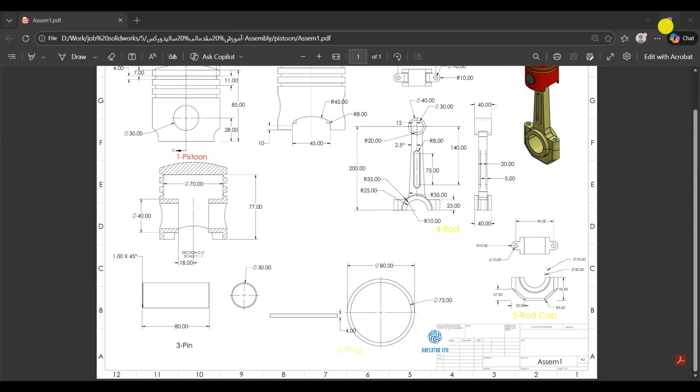Now let's design this ring together. Open SolidWorks and start a new part. On the top plane, start a new sketch. Create 2 circles in the sketch. Set the diameters to 80 and 72 millimeters.

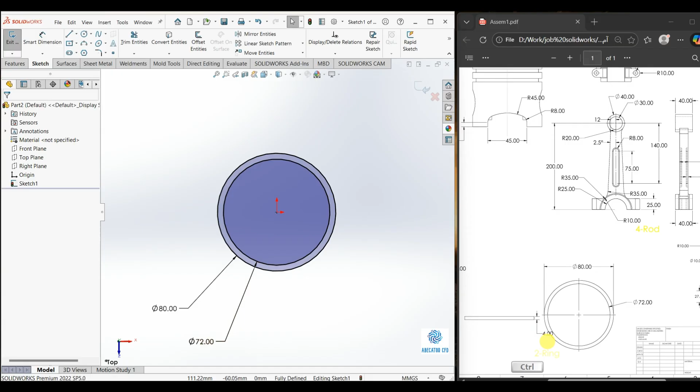The ring thickness here will be 4 millimeters. Now open Extruded boss/base and set the thickness to 4 millimeters. Then assign a color to the part and click OK. Save this part as ring.

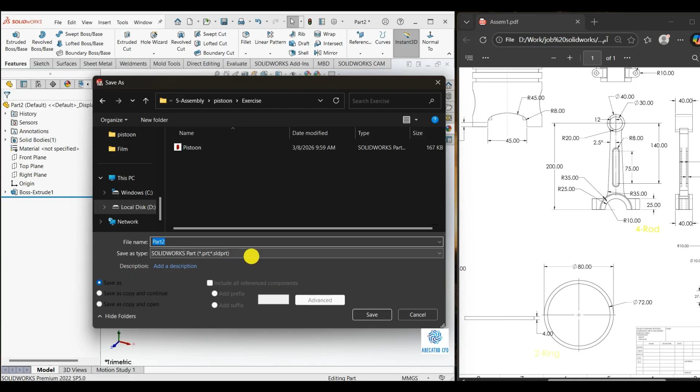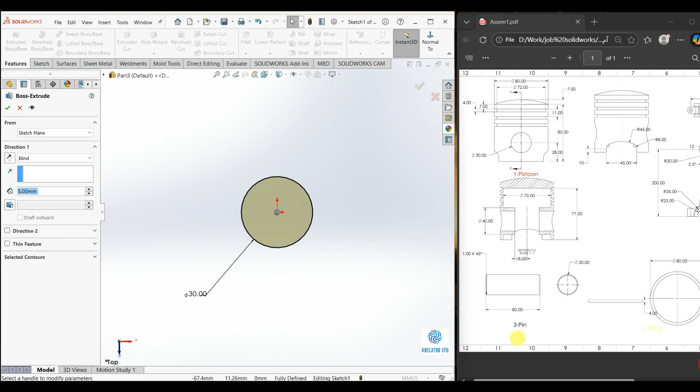Now let's design this pin. Start another new part. On the top plane, start a new sketch. Create 1 circle with a 30 millimeters diameter. Then open Extruded boss/base and set the length to 80 millimeters. Create the thickness here as well. You can also do this with mid-plane.

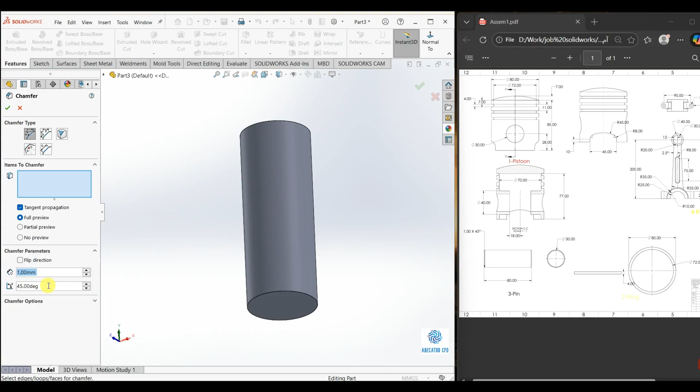Now add 2 chamfers on this face and this face. Set the chamfer to 1 millimeter at 45 degrees. Enter 1 millimeter for the chamfer length. Set the angle to 45 degrees. Select both faces and click OK. Now assign a color to the pin and save it.

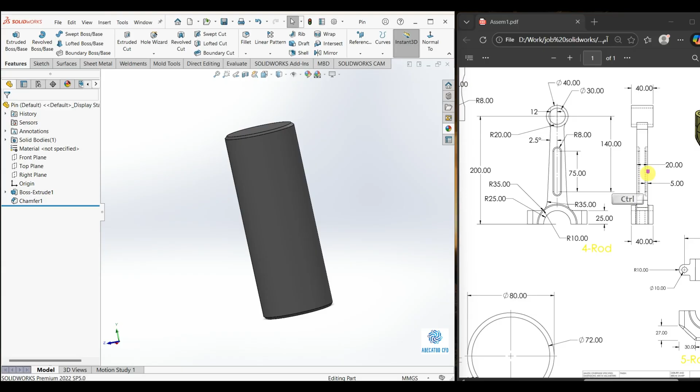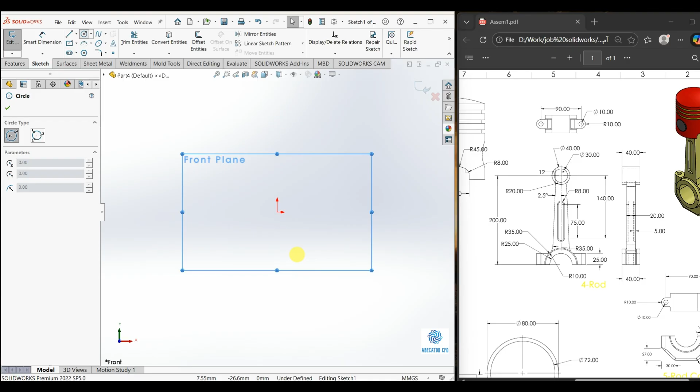Next, let's model this part too. Start a new part. Then go to the front plane and start a sketch here. We want to begin the design from the front view. So apply the dimensions shown here to the sketch. Create 2 circles with diameters of 30 and 40 millimeters.

Set the first circle to 30 millimeters. Set the second circle to 40 millimeters and add a centerline. Draw the centerline from the origin like this, with a length of 200 millimeters. So the centerline length is 200 millimeters.

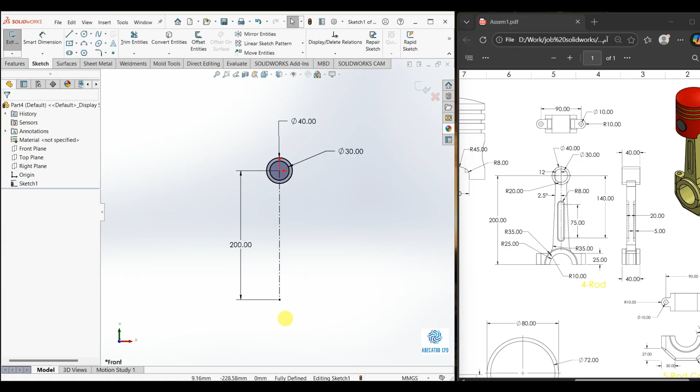Now create 2 more circles in this area. Their diameters are 50 and 70 millimeters. So create those 2 circles here. If the drawing gives you the radius instead of diameter, just multiply it by 2. That gives you the diameter value.

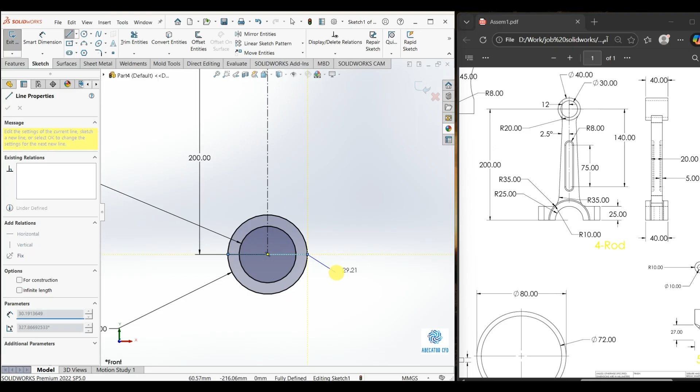Now draw a horizontal line through the center of this circle. Then use trim entities to remove the extra lines. Cut the extra segments like this. Now draw a line from this point. If it snaps tangent, go back 1 step so the next line becomes coincident. Then draw the line like this and relate it to the center line.

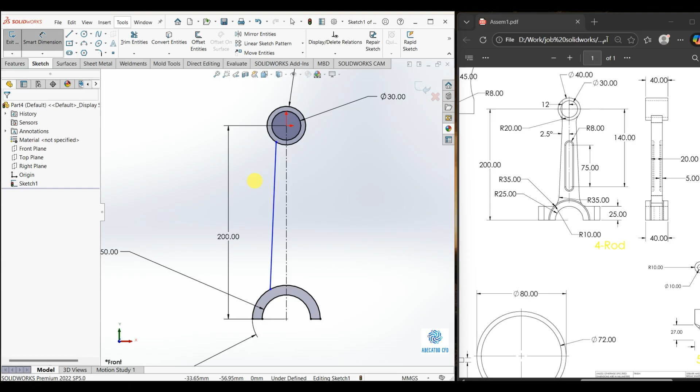Set the angle between this line and the center line to 2.5 degrees. Now also define a 12 millimeters offset from the center line. This is the distance from that point to the center line. Click the point and set that distance to 12 millimeters so the sketch becomes fully defined. Now we can mirror this line.

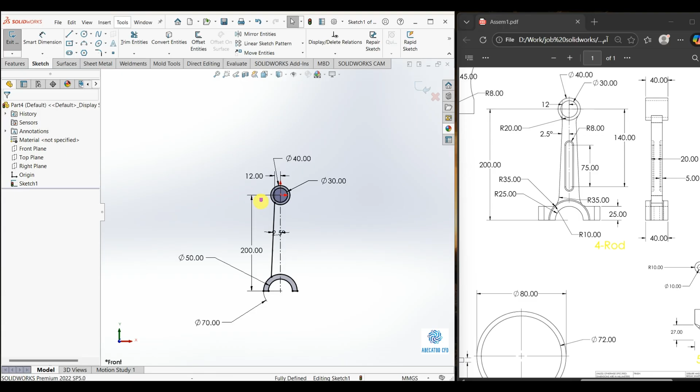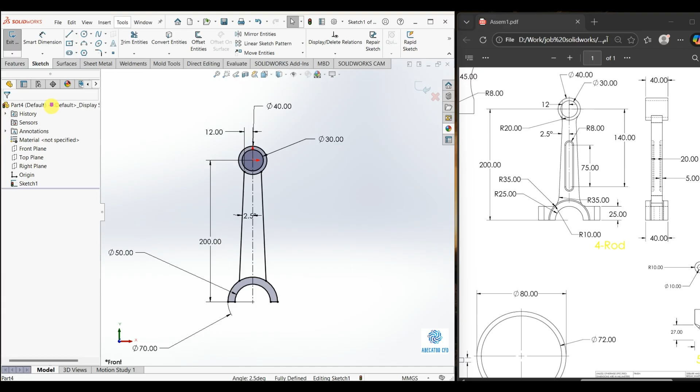Choose Mirror Entities, and in Entities to Mirror select this line. Then in Mirror About, select this center line. After that, click OK. Now open Extruded Boss/Base and create the thicknesses shown here. You can see that this side and this side have the same thickness. Both are 40 millimeters, so set the extrusion to mid-plane. Then apply 40 millimeters thickness to these sides.

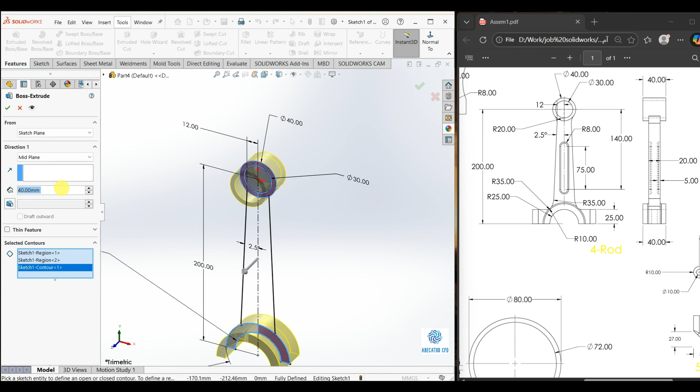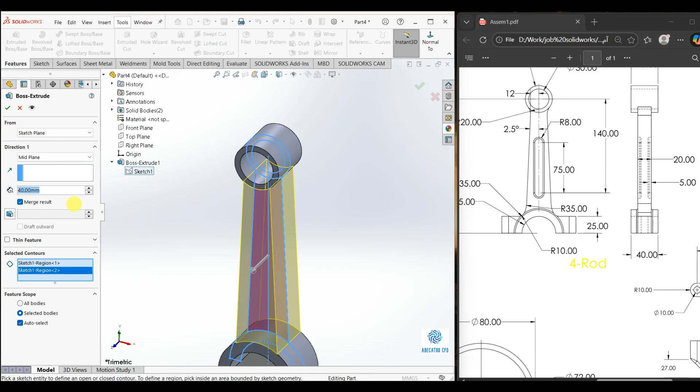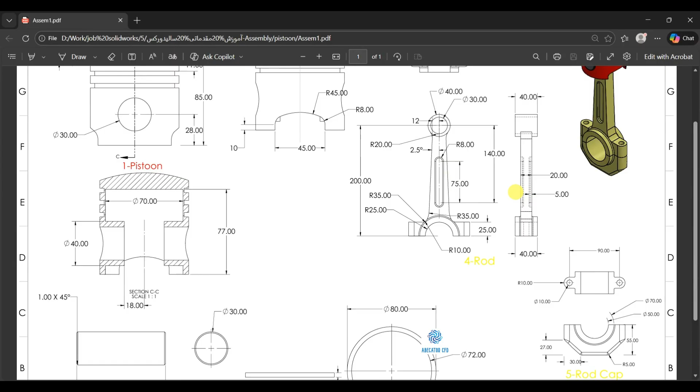Now we need to create the thickness of the main body. Open Extruded Boss/Base again. Select this sketch and this body region. Then set the body thickness to 20 millimeters. Now we need to create a slot in this area. The cut depth shown here is 5 millimeters. So create the slot sketch on this face. Then use extruded cut to remove 5 millimeters.

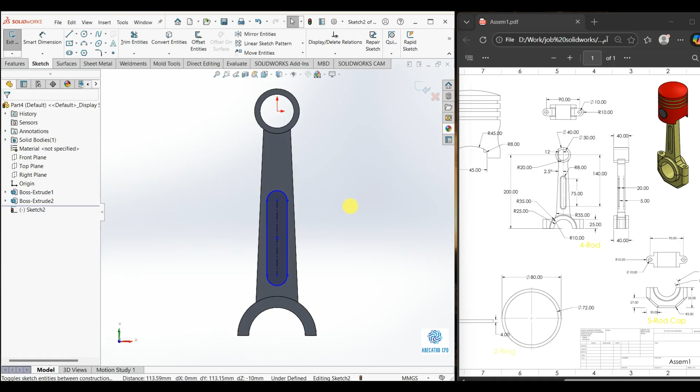Now start another sketch on this face and create a straight slot. Create the slot shape like this. Give it a vertical relation with respect to the origin point. Now let's set its dimensions. The slot length is 75 millimeters. The arc radius is 8 millimeters, and the distance to the origin is 140 millimeters. So set that distance to 140 millimeters.

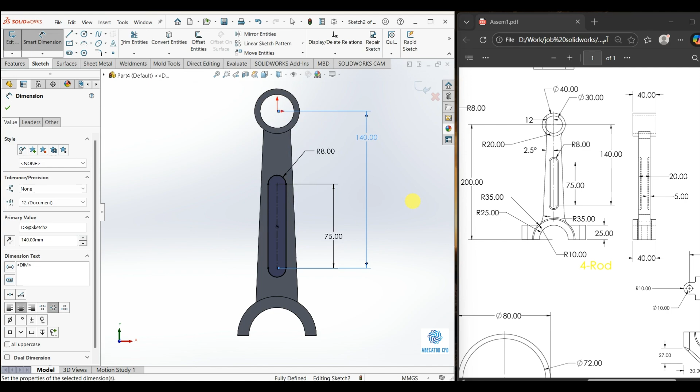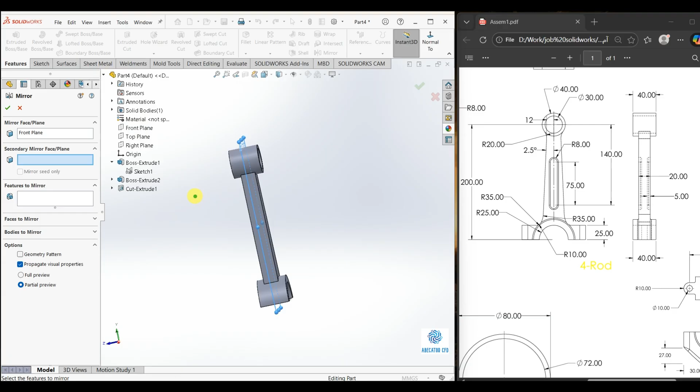Then use extruded cut and cut it 5 millimeters deep. That completes this cut. We need the same cut on the other side too, so use mirror. For mirror face, choose a plane that passes through the middle of the geometry. The front plane works well. In Features to Mirror, select the cut and click OK.

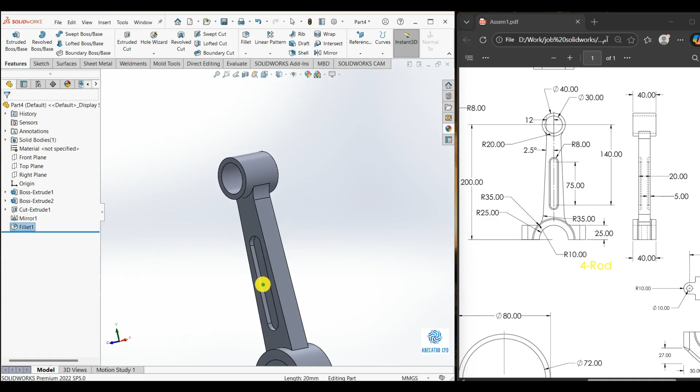There are also a few fillets to add here. This area has a 20 millimeters fillet. So create that 20 millimeters fillet now. Apply it on this edge and this edge. There is also a 35 millimeters fillet in this area. Now create that 35 millimeters fillet too. Apply it on this side and this side. Up to this point, we have finished these sections.

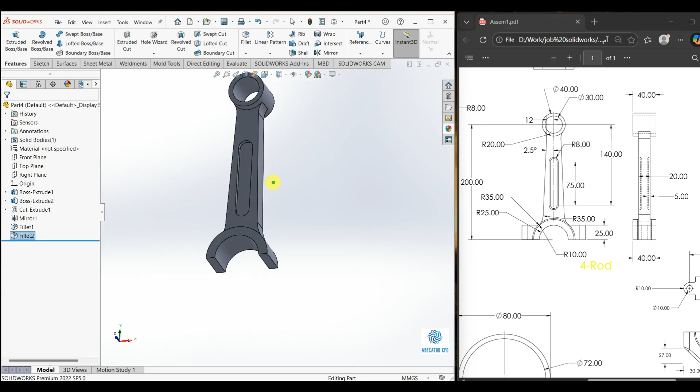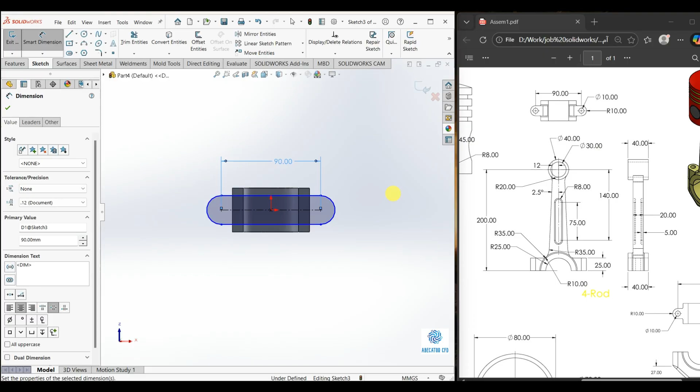Now let's continue the model and start a sketch here. Create the sketch on this face. Next, we need to make another slot. Use Centerpoint straight slot and draw the slot like this. The dimensions are given here. The slot length is 90 millimeters. Now set the arc radius. The arc radius is 10 millimeters.

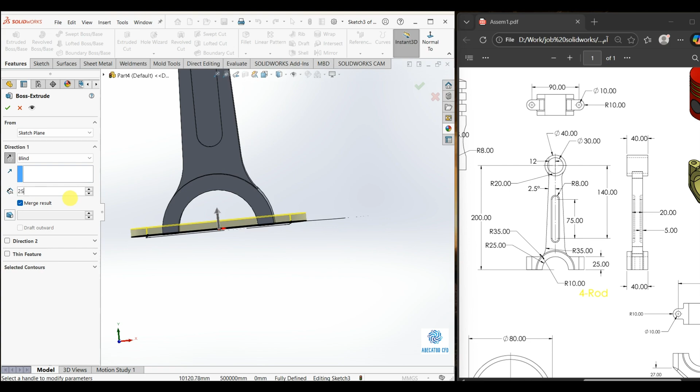The thickness for this lug is also given here as 25 millimeters. Reverse the direction, set it to 25 millimeters, and click OK. This extra area must be removed next. So start a sketch here and use convert entities. That will project the edges so we can cut this area. Then choose through all.

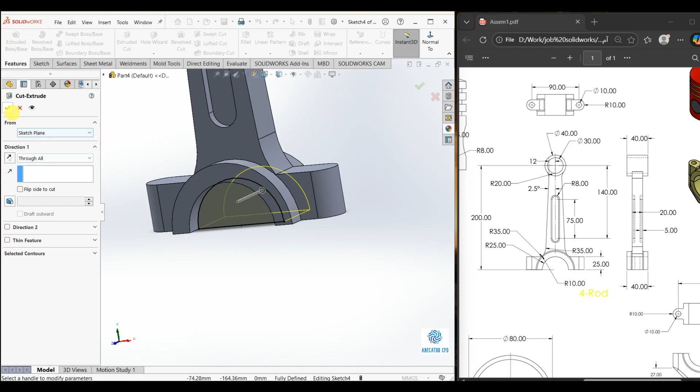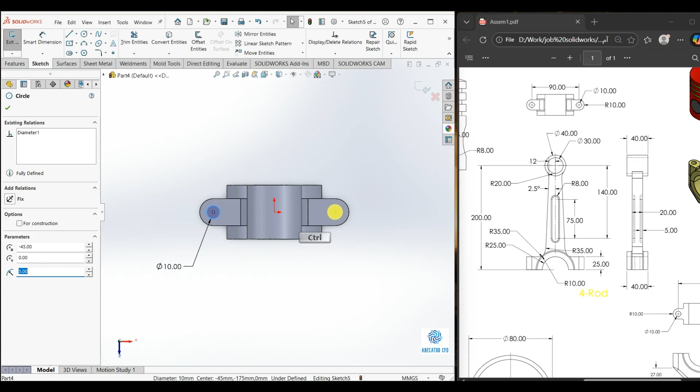Click OK. Now we need to create two holes, one here and one here. Start a sketch on this face and draw two circles. Place one circle at this location. Place the other one here and set both diameters to 10 millimeters. Make them equal, then use extruded cut. Set the cut to through all.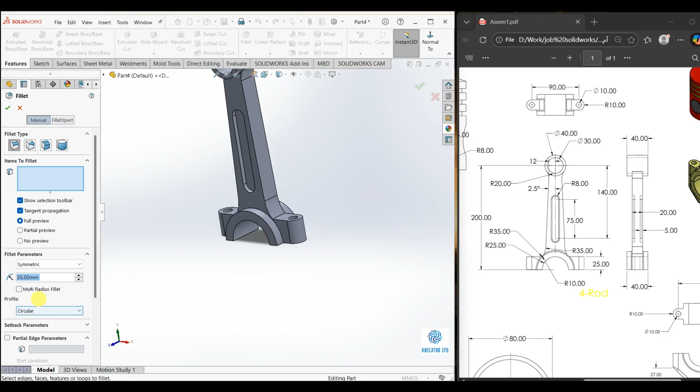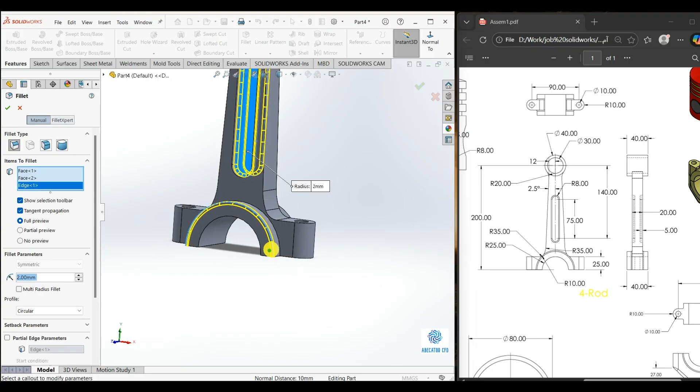The model is almost finished. We only need a few more fillets. Create a 10 mm fillet. Apply it on this side and this side. Also create a 2 mm fillet on this face and this face. Apply it here and here as well, then click OK. Now let's assign a color. Choose a color for the part. This color looks good, so save the part.